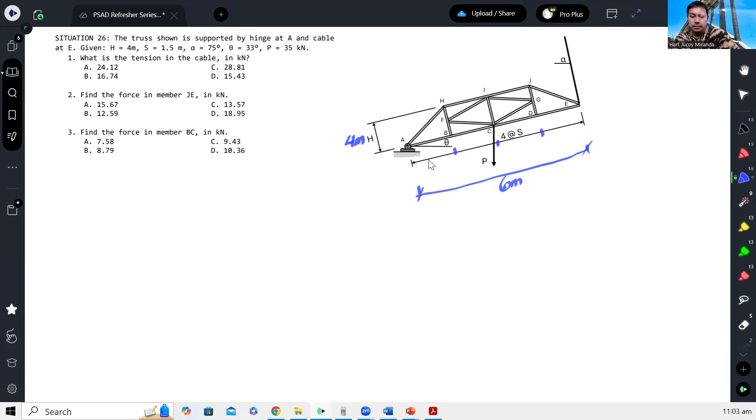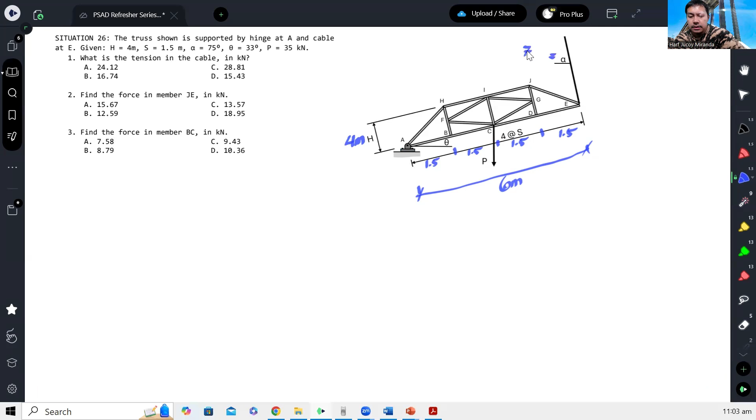You're given alpha to be 75 degrees, and theta to be 33 degrees. P is equal to 35 kilonewtons. This P is 35 kilonewtons, and it is vertically downward.

What is the tension in the cable? So we are looking for the reaction here. Let's call it T. Then, of course, since this is a hinge, it has vertical AY and horizontal AX.

So to calculate the tension T, it's simple. We just need to take the summation of moment at point A. But let's put in the measurements now. So here, vertically, we should be able to know what measurement this is.

Horizontally, to determine that, it's simple. Since this is inclined, if you draw a horizontal line, the measurement will just be - the 6 meters will serve as the hypotenuse, and our angle is 33 degrees. So it turns out the measurement here is just 6 cosine 33 degrees. And likewise, the vertical measurement here will just be 6 sine of 33 degrees.

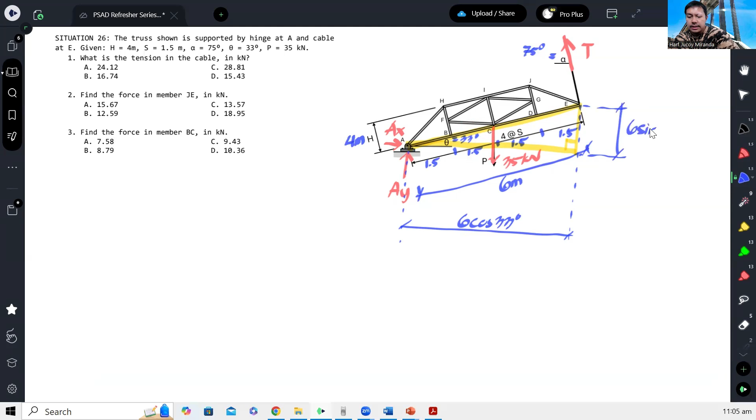What else? I also need the horizontal measurement here. That is just half, since 1.5, 1.5, so 3. So this turns out to be 3. So this one is also 3 cosine 33 degrees, if you consider this triangle.

And then also, our tension should be converted into its components. So the horizontal component is this, and the vertical component is this. We can easily calculate that since we have the angle alpha. So it turns out Ty is just T sine alpha, and Tx, I won't write it, but it's just T cosine alpha.

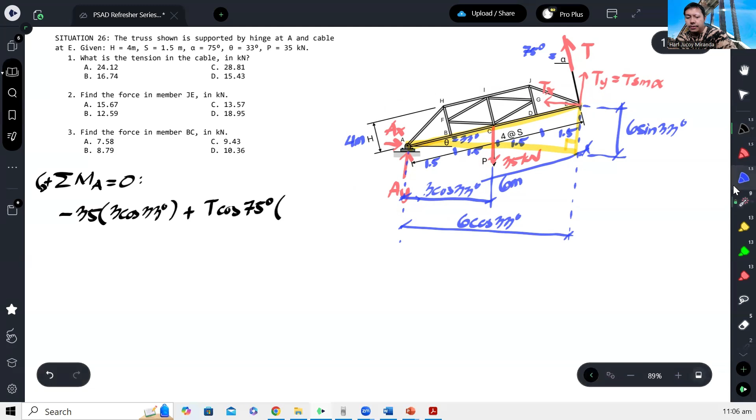Let's take summation of moment at A equals 0, assuming counterclockwise positive. So the 35 kN force rotates, and its moment arm is 3 cosine 33 degrees. Its rotation is clockwise, so negative. Then let's look at the horizontal component of the force - its rotation is counterclockwise, so positive. Tx is T cosine alpha, which is 75 degrees, times the moment arm of this force, which is 6 sine 33.

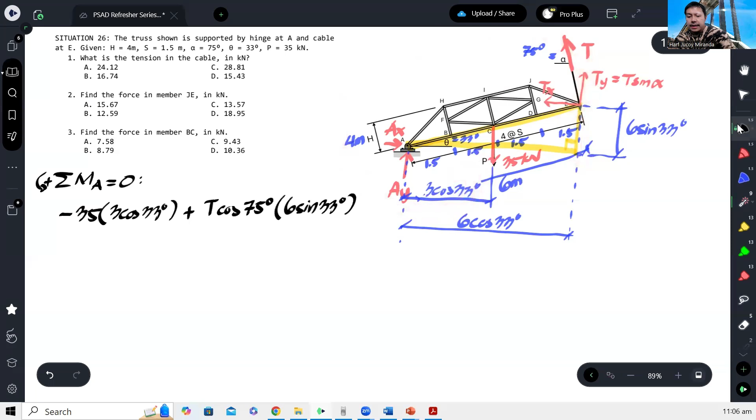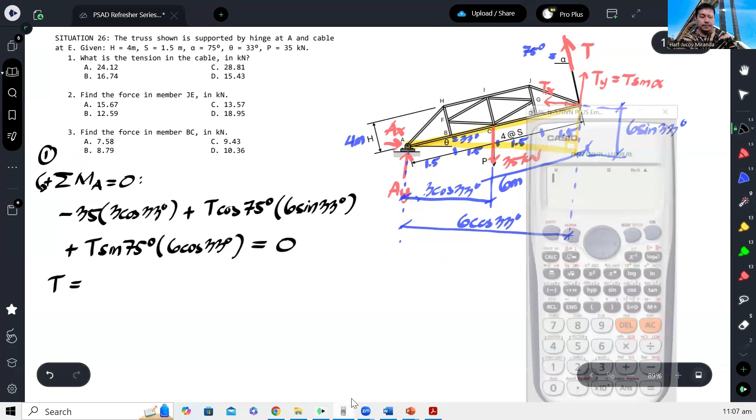And then we have the vertical component. Its rotation is counterclockwise as well. So plus T sine of 75 times the moment arm of the vertical component, which will be 6 cosine 33. Okay, and that's all the forces that will have moment about A, and that will all be equal to 0, and from here we should be able to calculate the tension in the cable. So we transpose 35 times 3 cosine 33, then divide by the coefficient of T: cosine 75 times 6 sine 33 plus sine 75 times 6 cosine 33.

That gives us 15.43 kilonewtons, and that will be our answer for number 1. Let me store this in the calculator, I'll put it in A - we might use that later.

Next, number 2: find the force in member JE. Sorry, it's not visible, but member JE is this one. To get that, I believe it's good to use method of joints at joint E, since there are only two unknowns there, and the only applied force is the tension in the cable.

So let's do number 2. We will apply method of joints at joint E. Originally, at joint E, there is an applied force, the tension, at an angle of 75 degrees. Then there's also an inclined member - this is member JE. And there's also member DE.

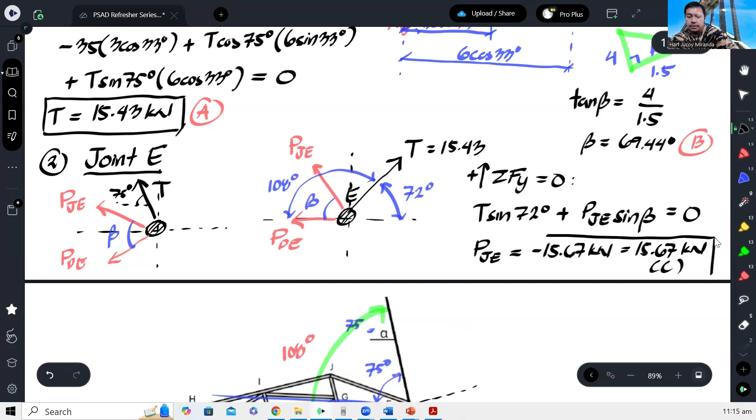Next, find the force in member BC. So yung member BC, ito naman yun. Okay, so kumbaga ito yun. So para ma-compute yung member BC, ang gagawin natin is magbe-method of section na lang tayo.

Kasi kung magbe-method of joint ka pa, pwede naman, dito ka muna mag-i-start, pero kailangan mo muna i-compute yung mga reaction dito. Tapos pag nakuha mo na ito, tsaka to, pwede ka na lumipat sa joint B. Tapos makukuha mo na yung BC. Pwede naman, no? Okay?

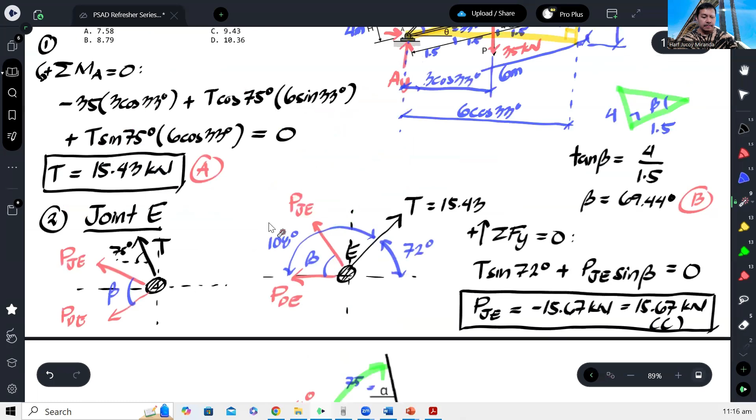Well, again, pwedeng mag-method of section, ha? So pag nag-method of section tayo, pwede kang mag-cut, pero hindi pa ganito. Dapat ang cut mo ay pa ganito. Okay? Para mag-moment ka sa H para makuha yung BC, na?

Pero pag nag-method of joint, halimbawa lang, gusto mo mag-method of joint, ang mangyayari lang is, mag-method of joint ka muna sa A, tapos lipat ka sa B. Okay? So, siguro gawin muna natin yung method of section.

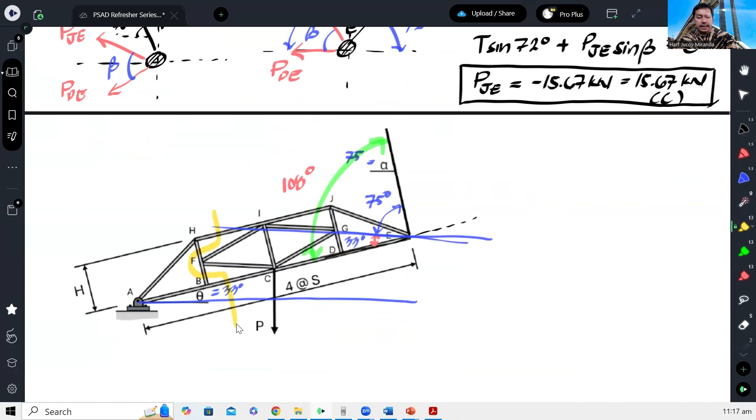So, method of section muna ako. So, cut ko to ng pag ganito. Isolate natin yung, I think, mas maganda na yung right side kasi hindi ko naman sinolve yung mga reaction sa A. No? So, i-isolate natin yung right side. So, ganito yung magiging itsura niyan.

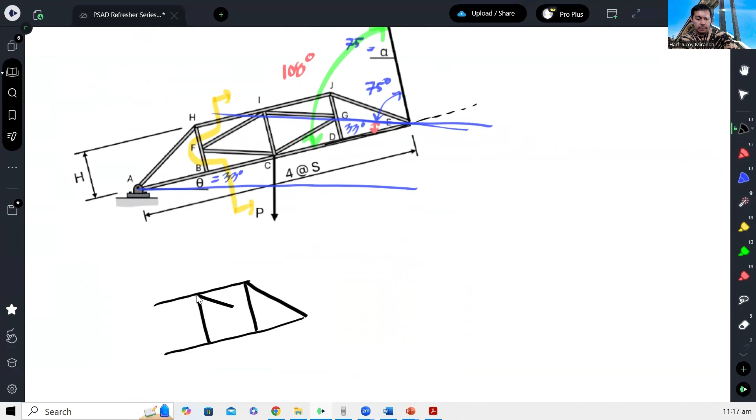Ayan. Okay? So, na kung saan, nandito yung force sa BC. Tapos meron dito P na 35 kilonewtons. Tapos ito yung T na 15.43 kilonewtons. Okay? Tapos para makuha ko itong BC, magmo-moment lang tayo dito.

Okay? Kasi dyan mag-intersect yung iba pang unknown forces. Okay? That is at H, no? Dito. Okay? And then, kapag ginawa natin yun, we should be able to calculate for the force at BC. Alright? However, I think it would be better to simply rotate this figure rather than analyzing it in this manner.

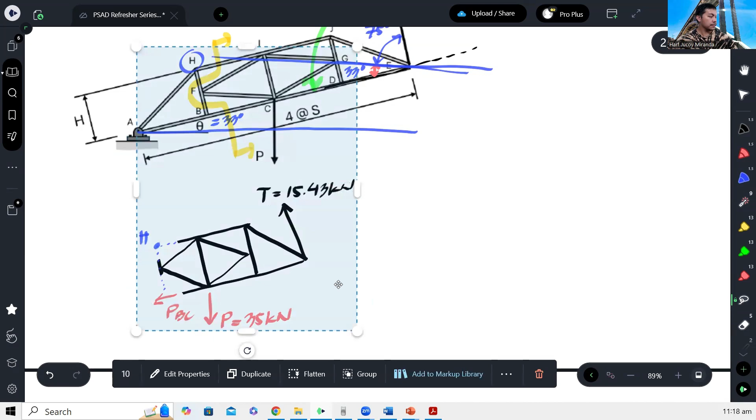Okay, so pag rotate natin yan, ibig sabihin ay igagawin natin horizontal yung base. Ganito. Ayan. Okay? Tapos just to be more realistic with my tension, kasi sa computation natin kanina, nakaano na siya eh, 72 degrees sa kabila. Okay, so 15.43. Okay? So, mas maganda kung ganito, no? Kasi ito, may sukat nito is 4 meters.

Tapos, ito ay tig. Okay, tig na 1.5. Ayan. Okay? Tapos, itong force natin, may incline din siya. So, yung inclination niya would be equivalent to 33 degrees with respect to vertical.

No? So, paano nangyari yon? Looking at this triangle, kung nag-drawing tayo dito ng, okay, kapag ito na kasing ginawa natin na x-axis. Kumbaga, ito na yan. Yan na yun, no? Tapos, ito na yung ginawa natin na y-axis. Okay, kung makikita nyo, klarong-klaro, na kung ito yung angle theta na 33 degrees, dapat ito naman yan. Okay, kaya naging ganito, naging 33 degrees ito. With respect to vertical, no?

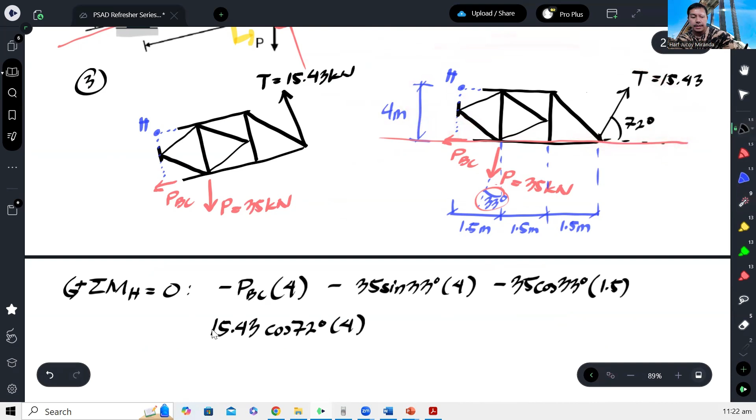Okay, and then of course, itong tension, meron din siyang dalawang component. So yung horizontal component muna, that is 15.43 cosine 72 degrees. No, ito yon. Ang moment arm nun would be 4 meters. Ang rotation nun, to the right siya, no? Ang rotation niya would be counterclockwise. Okay, so 15.43 sine 72.

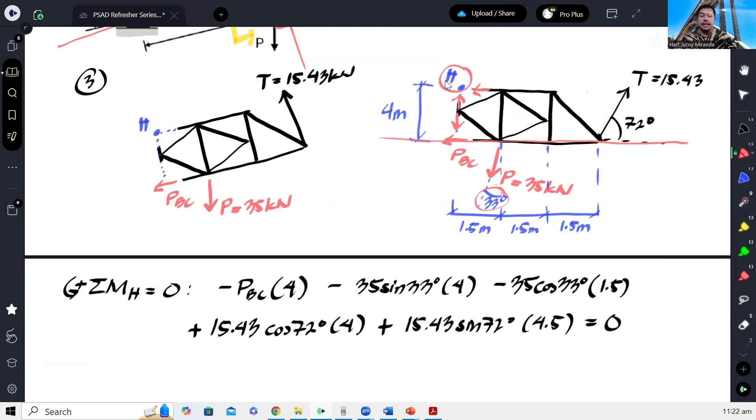So yung vertical component niya naman, ang moment arm ay ito, which is ilan yan? 4.5. Okay, tapos ang rotation niya is also counterclockwise, so plus. And that's it, all equal to 0. So again, yung mga forces na nandito supposedly ay mawawala ng moment kasi pinili natin na yung H yung point of rotation natin, no? So we have PBC can now be calculated.

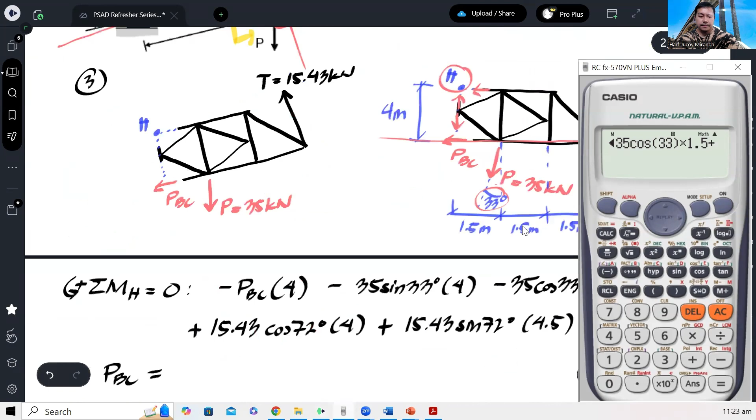So negative x times 4 minus 35 sine 33 times 4 minus 35 cosine 33 times 1.5, plus, minus yun. So, plus, yung tension ko, saan ko nilagay yan? Nasa A. Cosine 72 times 4 plus tension ulit, sine 72 times 4.5 all equal to 0.

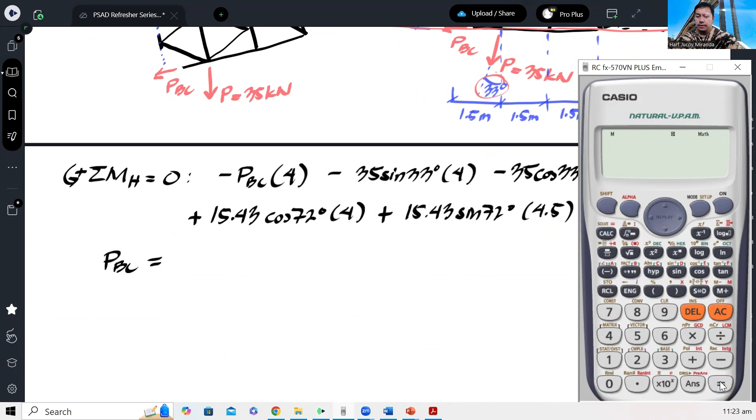Okay, and our PBC is negative 8.79, or 8.79 kilonewton under compression.

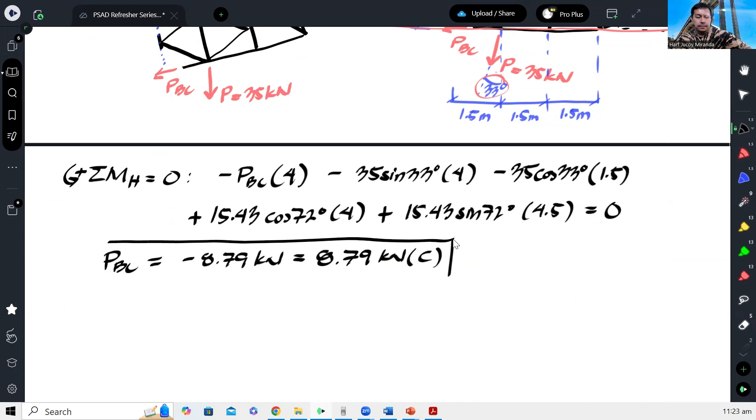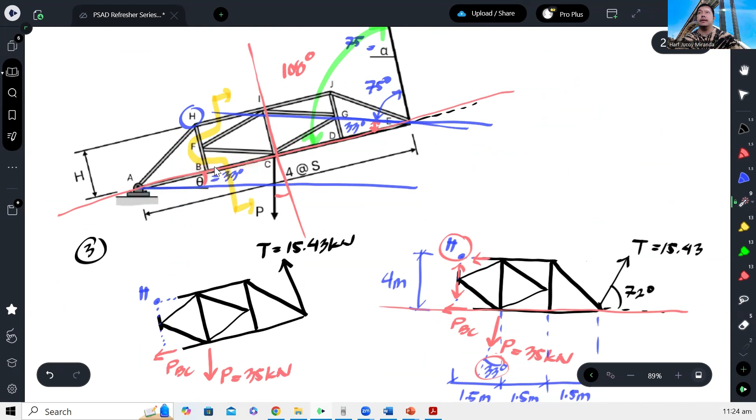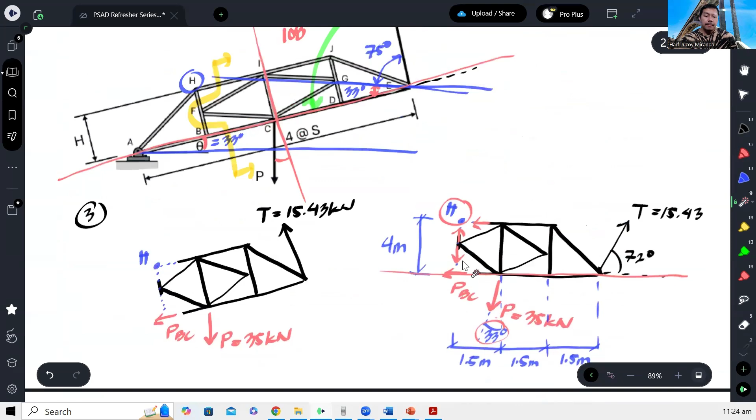Okay, so once again, sa choices dito, wala namang sinabi na compression or tension. So isa lang naman, so yun yung pipiliin natin. Okay? Again, alternatively, pwede kayong mag-method of joint sa A, tapos mag-method of joint ulit sa B, makukuha mo na yung BC. Okay? Kailangan lang mahanap yung reactions dito sa A muna. Okay? And you should get the same answer. So you can try that on your own. Alright? But that's it for this problem. That's how we solve this particular problem. Okay?